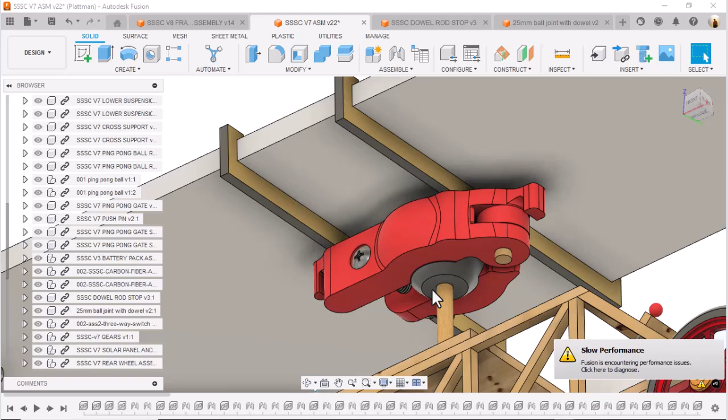Okay, I went ahead and opened up this file right here, and I'll show you the dowel rod, and that's it. So we're going to design the exact same thing. It's not going to take us that long.

So we go ahead and hit new file, and we're going to say our typical name, hit save, and we hit SSSC V8, and we're going to say dowel rod. We'll go ahead and highlight that, do a Control-C to copy, and we'll use that for the name when we create our component.

So new component, highlight this, Control-V, hit OK. So now we've got that file created. Let's go back over and look at that dowel rod again.

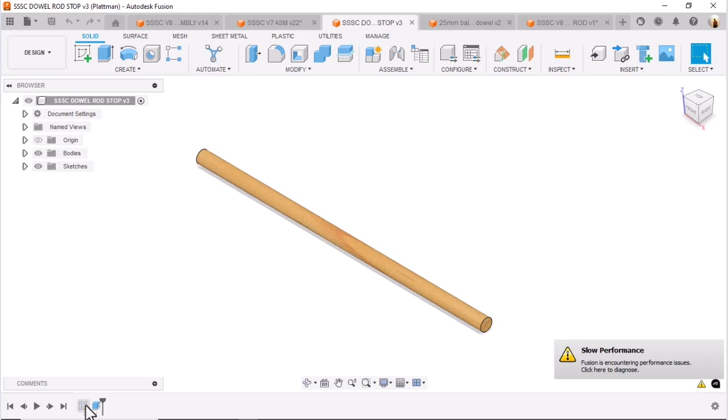So it's just two simple features. It's a sketch, which is at 4.7625, which I believe is 3/16. We'll go ahead and highlight that, and we'll do a Control-C. Yep, 3/16 is 0.1875 of an inch. So yeah, it's that size.

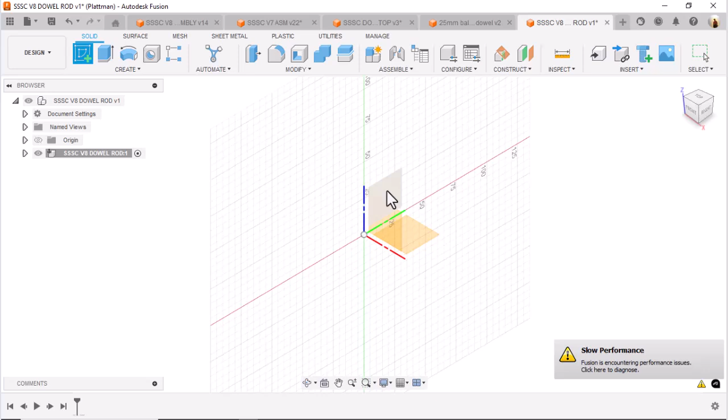Okay, so we'll come back over here to this. We'll create us a sketch. We'll do it on that plane. Actually, no, we'll hit finish that sketch. Let's go ahead and finish that. We're going to delete that, and we're going to put that on the top plane.

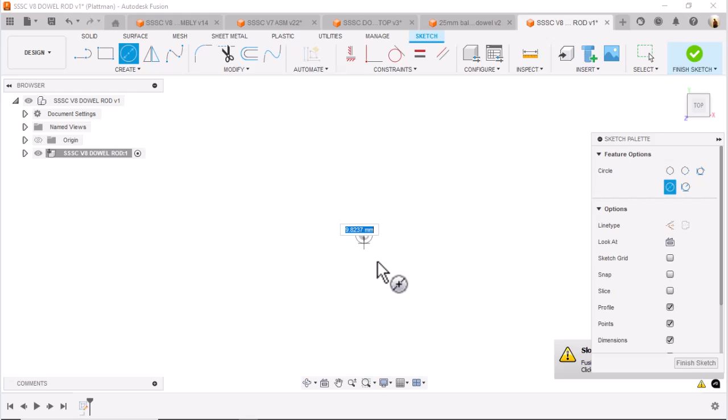So delete that. Create a new sketch. Again, sorry, we'll create it on the top plane. Circle by center, and we'll go Control-V. It should be that one size. Okay, we got that in there.

Let's go back to that dowel rod and take another look at it. Oh, that's the actual ball joint. Let's go back to the dowel rod here, and let's go ahead and finish sketch, and let's go 3D look on that. Let's go check out the extrude length of that.

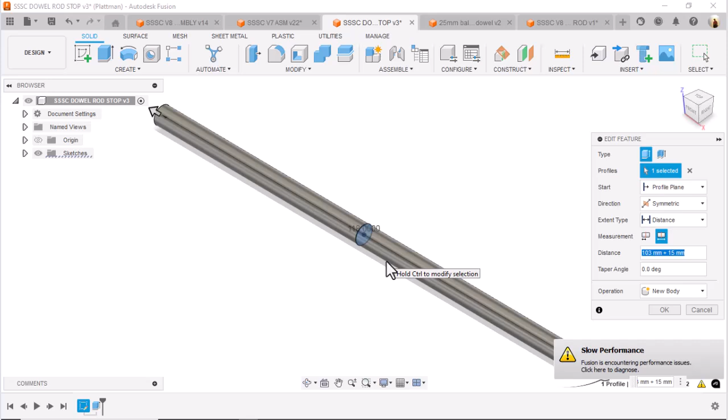Okay, so that extrude length is that distance right there. I don't know why I put that in there, but we'll go ahead and copy that. So it looks like it's 118 millimeters. So we'll copy that, come back over here to this, and we'll say extrude, and we'll say Control-V, paste that in there, boom, there it is. Okay, so that's in there. And it's actually in the correct orientation too.

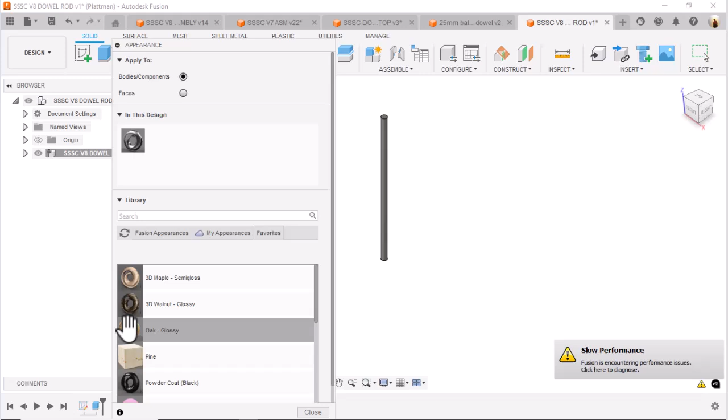So hit the A key, and we're going to go ahead and go to my favorites, and I have been typically using this. I'm going to go ahead and use glossy oak this time. So we'll go ahead and paint that onto this, and I'll put it over here on that. Let's see if I can get it on there. Yep, there we go. And we'll hit close. And so that file there, now that I've saved it, is complete.

Okay, so let's go back to our full assembly here, and this is our car, and we'll go over to our parts library, and let's check and see if we can see that file. Yep, there it is. We'll come over here and place it in here.

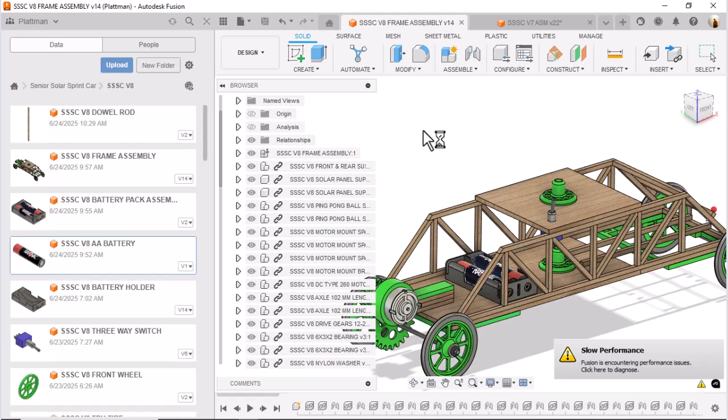And what we're going to do is we're going to go ahead and kind of pre-position this. Now before I do anything else, I'm going to hit OK. I'm going to go find this surface right here, which is this first thing. I'm going to turn that off.

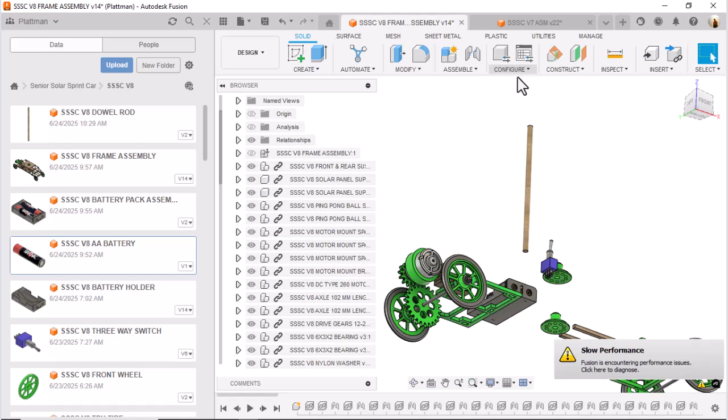And so the reason I turn that off is because when I do this joint, let me go ahead and collapse that. I'll go ahead and do this joint, the J key, which is this right here, joint. I'll come up here and snap to the bottom of that. Alright, and then I'll come over and snap to the very bottom of this one. And so we know that it is correctly placed.

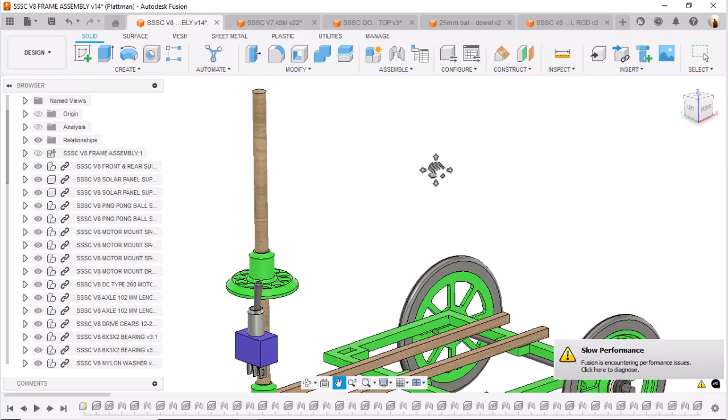So let's go ahead and rotate this out, and there it is. Now one thing that's kind of bugging me is the direction of that texture. So let's go back to that dowel rod, take a look at it.

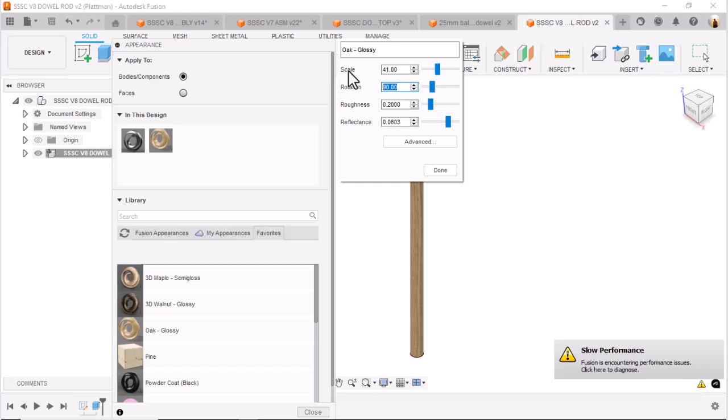We're going to hit the A key again, and we're going to do a double click on that, and we're going to rotate that 90 degrees. Now let's go ahead and highlight, put 90 in there. 90 degrees. Yes, that looks much better. We'll go ahead and close that.

It's kind of bugging me. I want to make sure the grain is going in the right direction. So we'll hit save on that. And those are kind of things you'll get better at as you model more. You'll start picking up kind of real world conditions of the parts that you're actually designing, especially when you're 3D printing, on your overhangs and stuff like that.

You'll start really compensating in your design for that. So that looks really good.

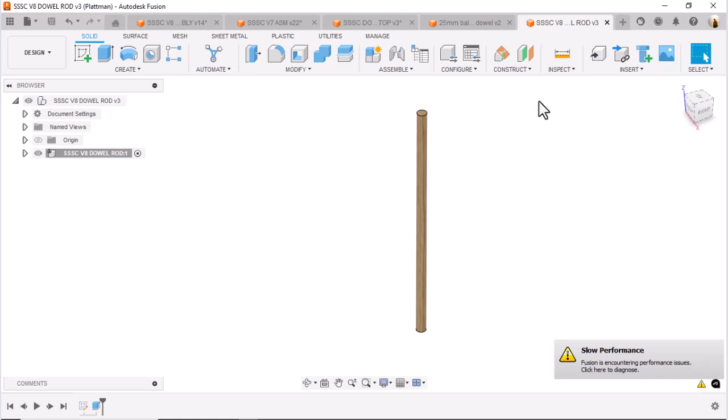So I'm going to go ahead and close that file out now, and let's see what we got designed here. Oh, this looks like a really hard file, guys. So this is the actual knuckleball, a 25 millimeter knuckleball.

So let's go ahead and create a new one, and we're going to call this one, hit save. We've got our SSSC V8, and we're going to say knuckle. I'm not going to put 25 millimeter in there, it's just not necessary. Knuckleball. And we'll call it a day.

Highlight that, Control-C, copy that. All right.

Let's go ahead and look at the other one for a second. Whoops, let me go back here real quick. Do a right mouse click, create new component, highlight that, Control V, hit OK. Let's go back and look at this component.

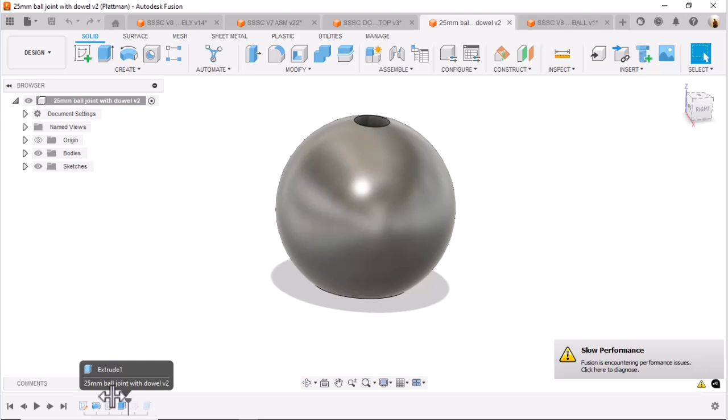So I'm going to rotate this all the way back over to here. I'm going to come up here and turn my sketch on. I want to see this guy. And let's edit that sketch just to kind of get a good visual of it.

Pretty simple, 25 millimeters, that's easy. Let me show you how to make a ball. So we'll come back over here to this, and we're going to do it on the front plane. We're going to go circle by center, and we're going to key in 25.

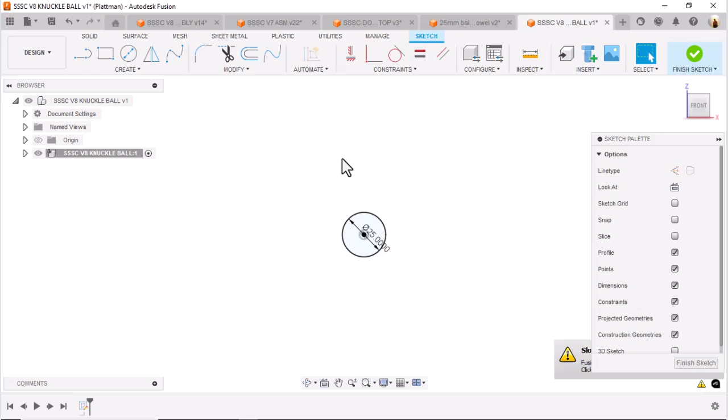Okay? Then we're going to just hit a line. Go up here on the top of this, come all the way down the bottom, hit our S key for shortcuts. We'll hit the trim command, we should hit just trim, and we'll say finish sketch.

Okay, looks like a ball to me. Let's go ahead and hit revolve, and I'm gonna select the axis. There we got us a 25 millimeter ball.

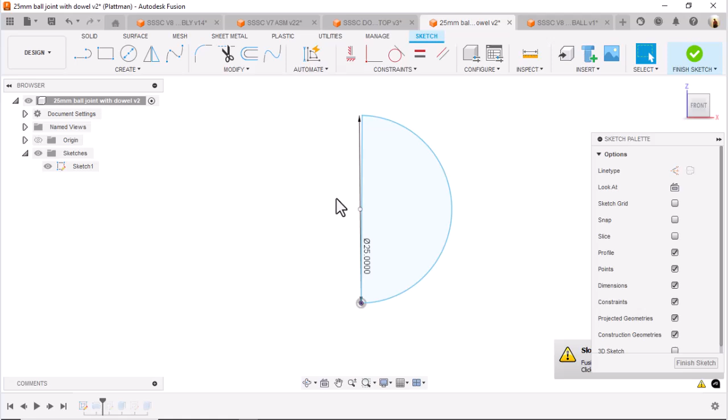That looks good. Okay, let's go back to the other file, see what else we got to do next. We'll finish that sketch. We know that we've gotten it revolved.

So now what I'm going to do is come in here, and I'm going to look at this sketch right here. So let's do edit sketch, and I'm going to come over here to kind of a 3D view, front view like this.

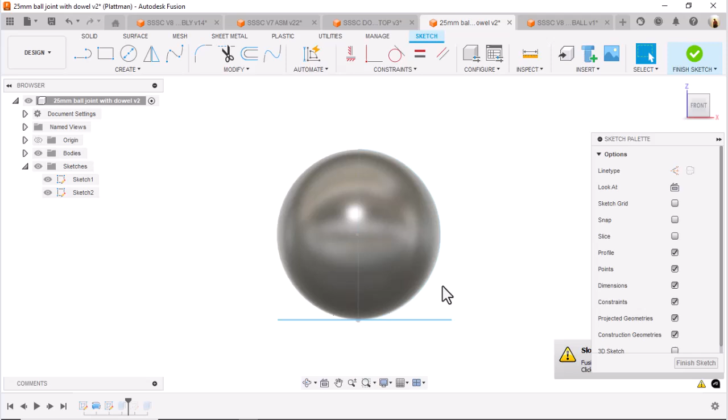Yeah, and looks like what I did is I just put a square out there, and I'll do the same thing here. So we'll go back to this. Now the difference on this is going to be, I did not draw that on.

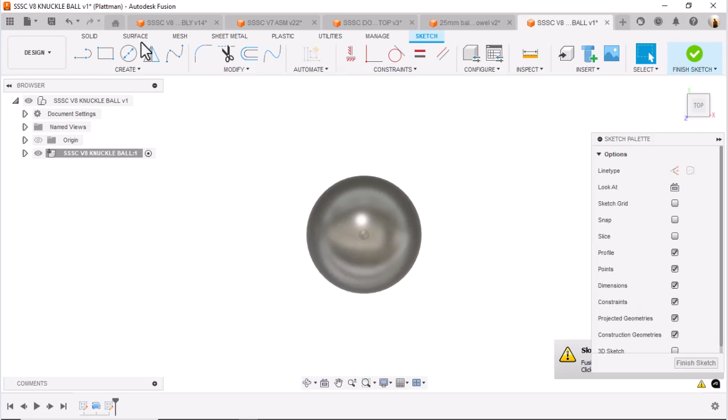Yeah, we'll make it work. I don't know what to do. Here we go, we'll just draw us a rectangle, a little easy peasy here.

Now that rectangle should be going right through the middle of that ball. Yep, it sure enough is.

So all we're going to do is hit the move command, and we'll say select what we're going to move, which is, let's get the whole thing.

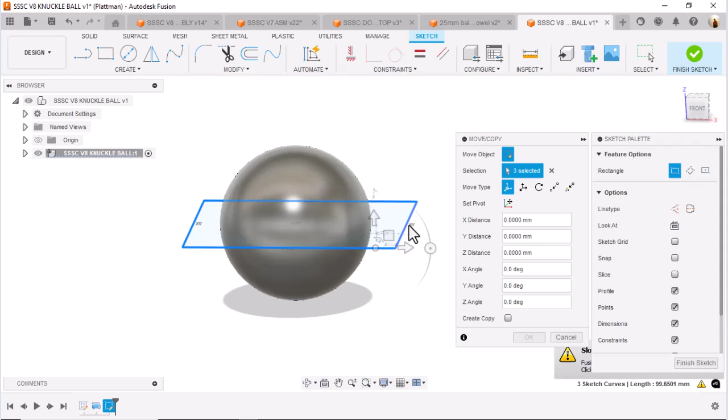And we're going to go look at this ball again on the front view. Just going to rotate that down. I'm going to go down just a little bit past it, like right there. Hit OK. So, because my guess, which I probably shouldn't be guessing, but my guess is there's an extrusion.

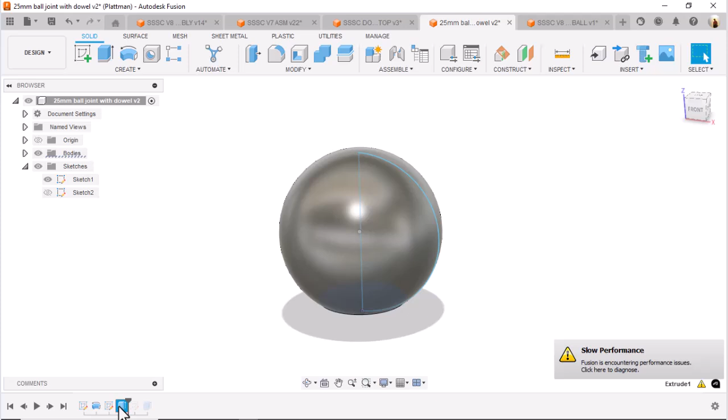Hit finish on sketch. There's an extrusion here, let's see what that is. Edit that feature. Yeah, it looks like he went up 2 millimeters. I'm going to say 2.5.

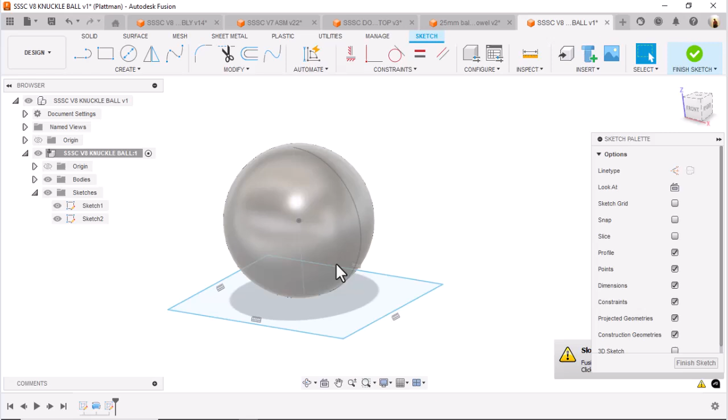So I'll come back over here to this, and I'll make sure that my sketches are turned on, which is this last one here, and I'm going to say extrude, and I'm going to say 2.5 millimeters. Okay, yeah, so that got me that circle right there. I need to turn that sketch off again, so get rid of him, turn those both off.

Okay, that looks good. So let's come back over here to this guy, and looking good. I think we've got pretty much the same thing going on here. Let's go ahead and continue on over, let's see what we got.

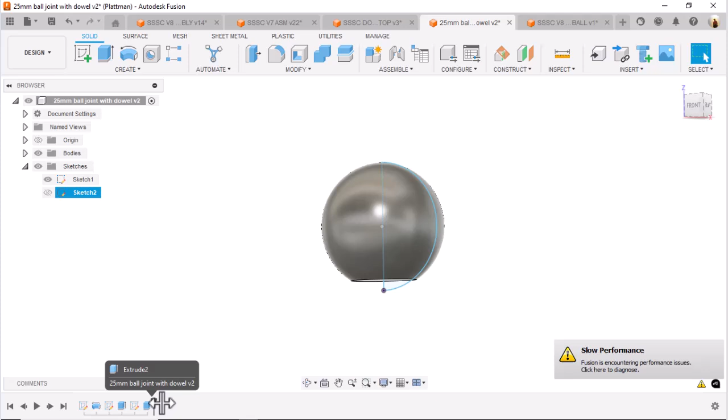I've got a hole in there. Yes. Now this hole is going to, let's go ahead and edit this and look at it. That hole is, looks like...

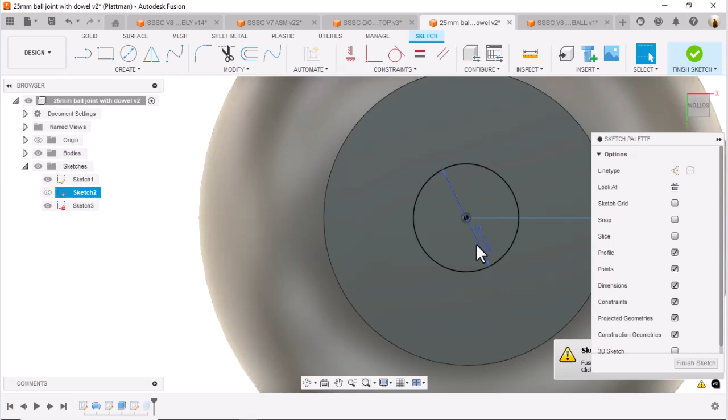4.826. We're going to go ahead and copy that dimension. Yeah, 0.19, I thought it was a little bit over the size of that extrusion. So let me go ahead and go over, and it goes all the way through. So that's easy peasy.

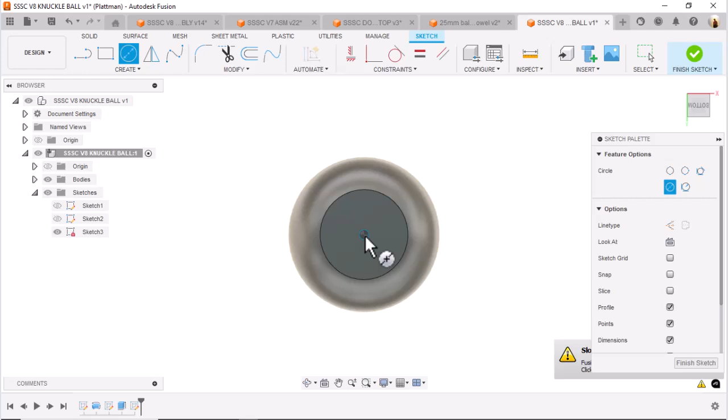So we'll come over here to this surface and do a sketch on the bottom of it. I'm going to draw a circle, 0.19 inches, because that's a little over 3/16 of an inch. When we 3D print this ball, it's going to be a super tight fit. Even with this measurement, we may have to sand that rod down a little bit, but that's no big deal.

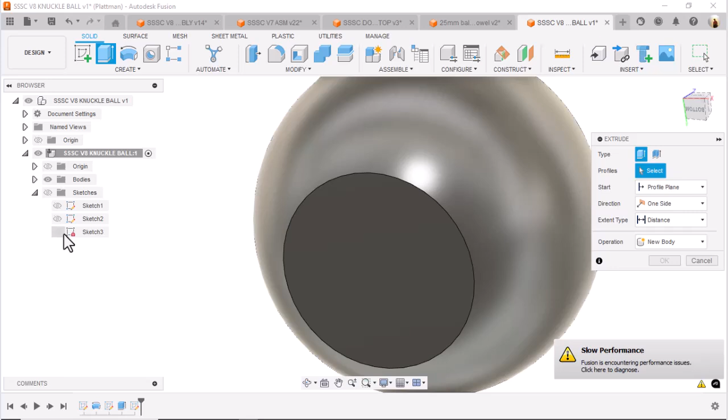Make sure to turn that sketch back on. Wherever it went... there it is.

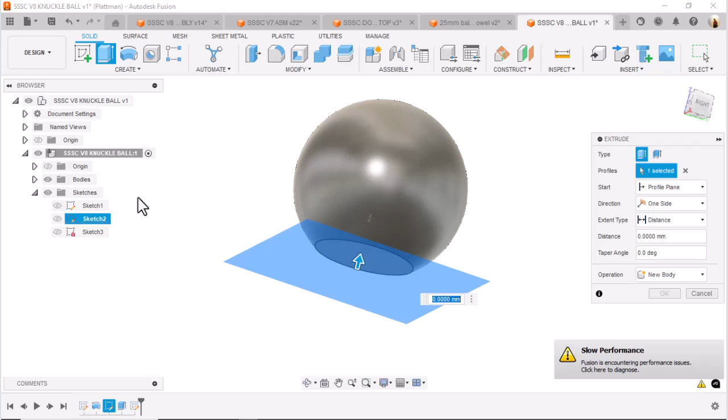Okay, got off my phone call. So now what I'm going to do is turn off that second sketch, I hope. Let's do that again. Turn off that one, turn off this one. Okay, one of these has got to get turned off. Oh, I see what I'm doing. Let me undo that, cancel that, and grab that sketch right there.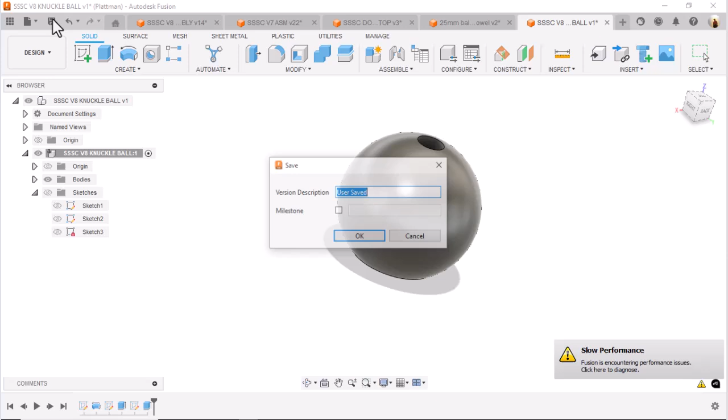I'll hit my extrude key, command, that key, and extrude through there. Okay, so that's done, we've got that part done. And now what we need to do is hit save on that. We're through with him, looks good. We'll go ahead and close that window off, and close this original one off.

And we've got that dowel rod done. We'll close him off. So let's go back to not this assembly, but our new assembly. Okay, I'm going to go ahead and refresh that just to be on the safe side for this old one.

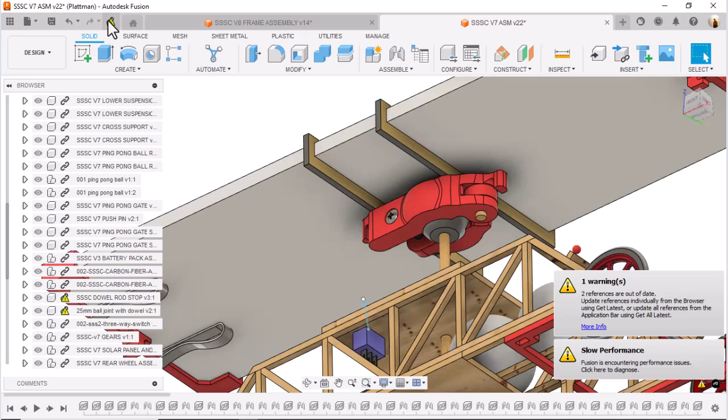And I'm going to come back here to this, our new assembly, and obviously you don't see the floor because I turned all that off. Let's go ahead and turn that back on just so we can see it. Now I'll go back and hit this refresh, and as that refreshes, we will go ahead and hit save.

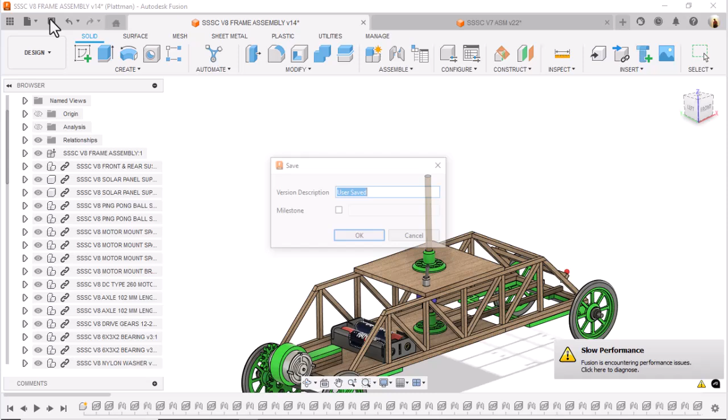Yep, save that. And I'll go back to my parts view and I'll grab that dowel rod, that knuckle, and pull it over here. And this is pretty easy to do.

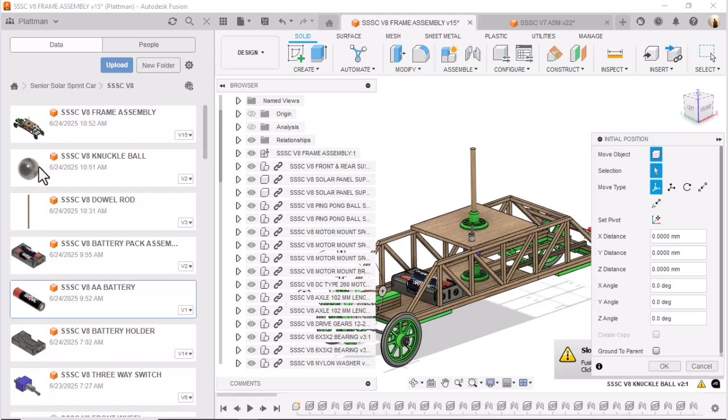Essentially all we're going to do is mate this here. I'm going to turn this off so I can see it. Pull this up like so, and I'm going to rotate up like that. I'll hit OK, hit the joint command, which is this guy right here, and I'll go snap to the center. I'm going to put it right on top, and I'll show you why. I'm going to put it right on top, right there. Okay, now once it's on there, I'll go to front view.

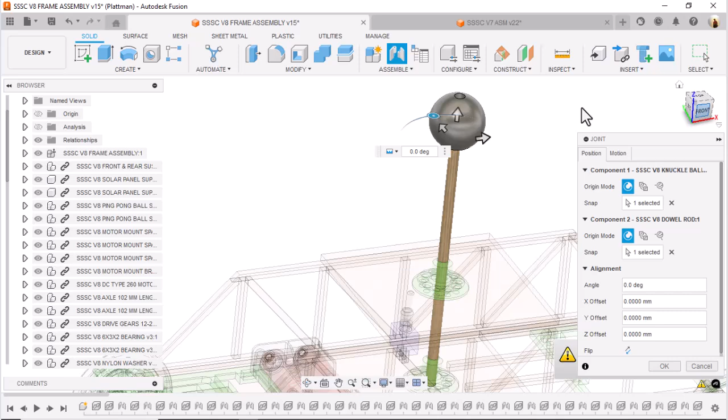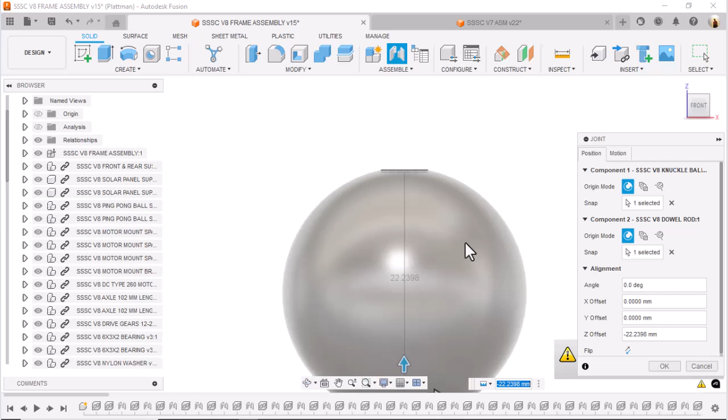I'll roll out here, and I'm going to change my view display to visual style with hidden edges, because I want to be able to see this ball as I slide it down, and I want it to be just below — let me roll up on this — just below that opening. That looks good right there. Rotate that around, that's fine. That's perfect, hit OK. So now we'll zoom out here, and now we see all of that.

Let's turn off that one, hidden line view, visual style. Turn that off. Come up to visual style, turn that off, back to hidden, and there we are.

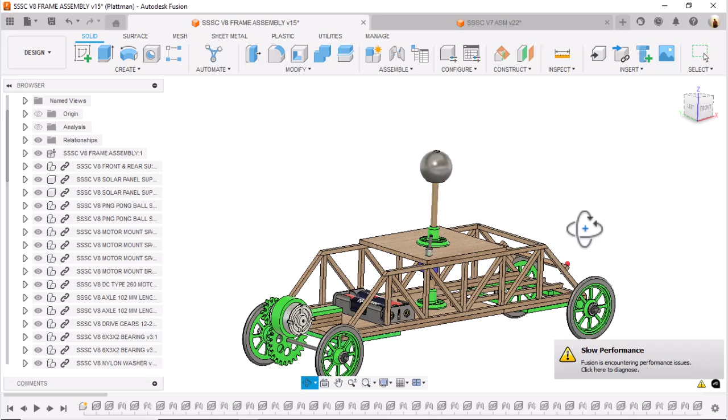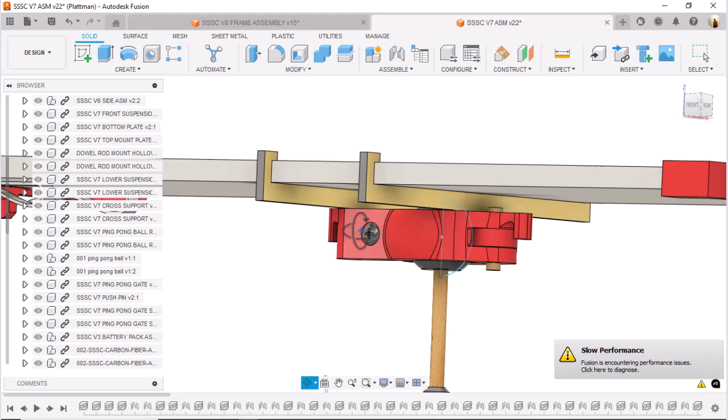So now the next thing we need to do is design a very complicated part. We'll come back over here and I'll show you what I'm talking about. The next thing we need to design is this guy right here, this knuckle ball. This is very complex — let me restate that, it's an advanced part. I wouldn't say it's very complex, but we're going to reverse engineer this one that I've already done, and apply it to this new assembly right there.

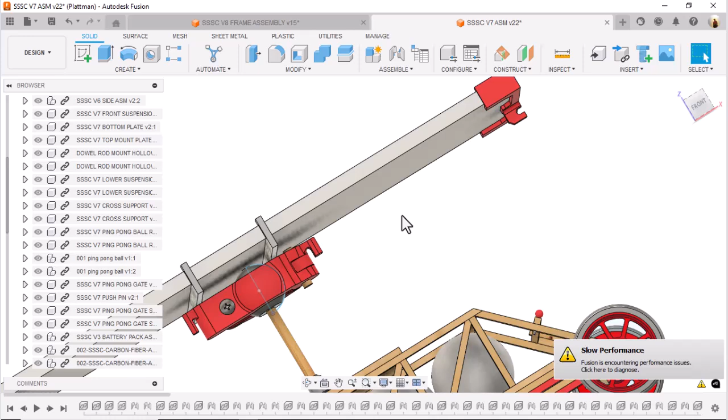Okay, it's going to take a while to get that one done, but suffice to say you're going to learn an awful lot about fillets, and also what these tabs are here on the side. The tabs on the side are for us to put a rubber band from here over to here on the end, to hold the solar panel in place. You basically put tension on both sides, because you've got one on the opposite end as well, going from here to there. But we're going to design that part, and it should be a lot of fun, and we'll get that guy knocked out as soon as we can.